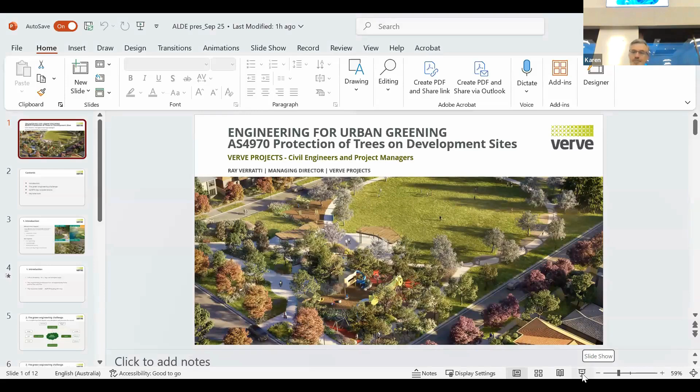That was yours, yeah? Yep. Okay, we're on. Can I move that screen down? Yeah. So I can just see this. Yeah, beautiful. Okay.

Hi everyone, I'm Ray, and I've been asked to do a presentation on the protection of trees on development sites, part of a bigger story of what I call engineering for urban greening. I think as engineers, we've got a really great opportunity to lead the way in improving the amenity of the suburbs that we're all creating. It's a big topic, but it's going to be short and sweet because I've got Mark here with the big long cane, and he's promised to whip me out if I go too long, because I can get a bit excited. So just bear with me.

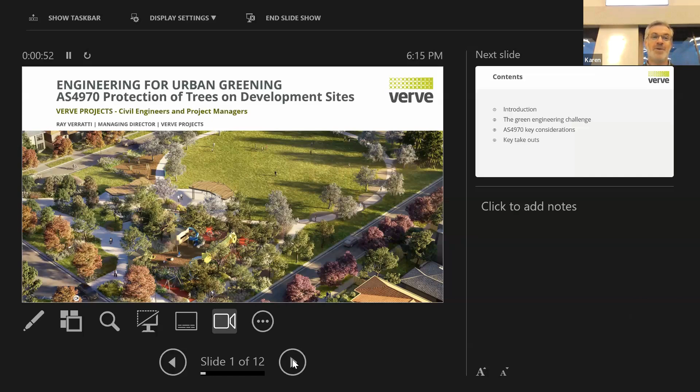So we're going to go through a bit of an introduction of who we are and what we're doing, called the Green Engineering Challenge. I'll talk about the bigger picture, and then we're going to dive into the Australian standard, which is specifically around tree protection, and hopefully I'll leave you with some key takeaways. Hopefully you'll find this informative.

So, just so you know, Verve Projects has been around since 2001. We've been fortunate enough to work on some of Melbourne's really good master planned communities, and we operate in civil engineering, project management, and a bit of development advisory to help our clients acquire projects, plus this concept of urban greening, design and advocacy. It's been a lot about me, but now it's blending through our organisation, and I'm really proud to say that Verve's staff are really connecting with this idea, and we want to integrate it into the way we go about doing things.

So this concept of engineering for urban greening - as I said, it's a big and complex topic. I think as an industry we've sort of disconnected ourselves a little bit from the ultimate outcome. We're about building neighbourhoods and communities, and trees are part of the infrastructure, what I think we should be calling the infrastructure mix. As engineers we coordinate all the elements, but probably don't do this element as good as we can, and that's been my thrust over the last few years. There is some sophistication to this, but I'll leave it at that because it can go on and on. I think the engineering profession has a real big opportunity to be part of the solution.

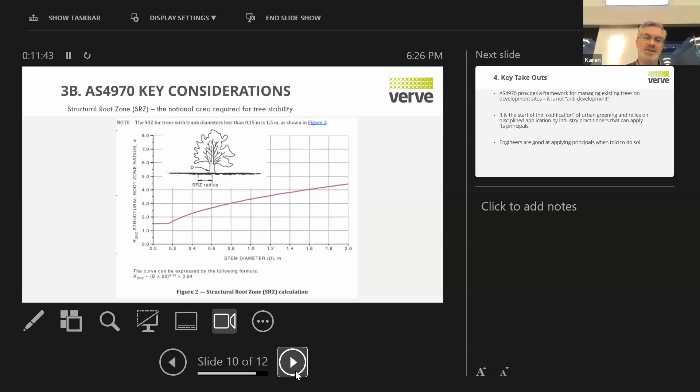So some key takeouts—and this first point is really important—the standard for protection of trees on development sites provides a framework for managing existing trees. It's not anti-development. I think there's a sort of 'oh my God, this is going to cause grief' reaction. Yeah, sometimes it does, right? And there's ways around that. But generally, if you take a non-judgmental approach and just think this standard is here to help you work around a constraint, right? So it's not anti-development, it's actually pro-development. And if you have the right team in place, you can actually deliver and maintain the natural environment.

I also think the standard is the start of what I'll call the codification of urban greening, and relies on disciplined application by industry practitioners that can apply its principles. I think we'll see more of this codification starting to come. A lot of cities around the world, and even some jurisdictions around Australia, are now starting to really force the issue on this. In Melbourne, we're starting to see councils putting the 30% canopy cover requirement into planning permits. I think that'll gather steam over time.

As I said, I think as engineers we've got an opportunity to influence and be part of that codification. And I reckon we're really good at applying principles when we're told to. So when we're told to do something, we're really good at it, but when we're not told to, we don't worry about it. That's fair enough, because we've got pressures from our clients to deliver product quickly, efficiently, and cost effectively. And there's always a perception of 'why should I do it if next door ain't doing it?' Until you standardize that, I think we're always going to be just talking about this stuff and not actually doing it.

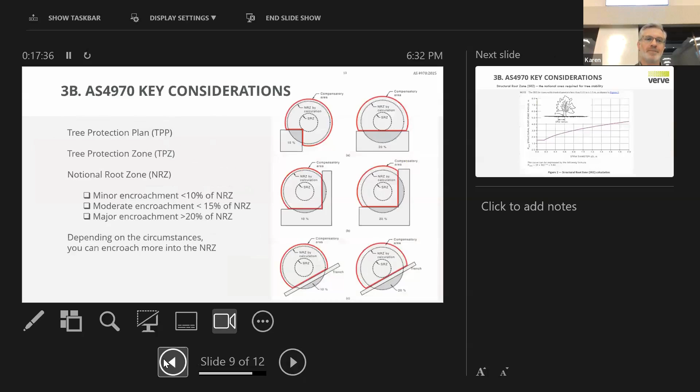I know that's not what your presentation is about, it's about the code, and I have to say I'm quite excited about reading the code, because it's got lots of things that can help us. But how do we get around the bigger picture, tiny lots, tight streetscapes? Because that's where the trees are going to be, but we just can't make it.

Most councils have a 16 metre street. And most councils now in a 16 metre street will only let you grow a medium-sized tree. Yeah, in your slide they're massive trees, and that's what we need in the street.

100%. And I think history shows that it can be done, it's been done, yes, but all these rules and regulations are there. Correct, and that's where I think, personally, there needs to be a big reform on all of that.

But then in this one I think I've got service infrastructure, right? So I think we have - in fact Matt Thompson's here who did it for me. Yeah, big call out for Matt Thompson. When you were, I think, an undergrad when you did this for me, I got Matt to go through all the offsets from all the respective councils, the different offsets to trees.

You've got all the different offsets. In some councils you can't plant a tree 4 meters from a driveway, or 5 meters from a light pole, and they're all different. So for me, that needs to be completely reformed, if genuinely you want to improve the urban greening outcome.

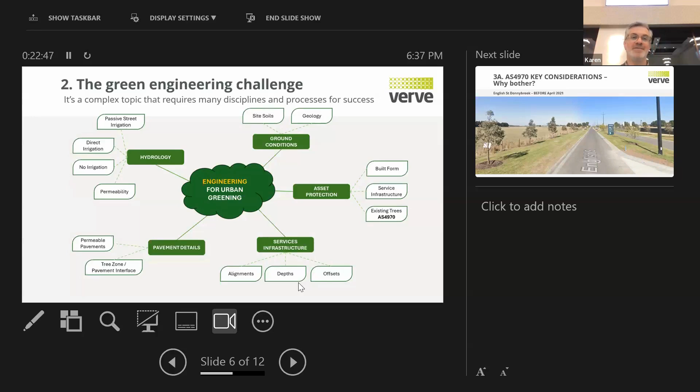It's part of that story here where urban design, I've started to challenge even the idea of the 16 metre road reserve. I think I did this a while ago, but I reckon it's probably 60 to 65% of the roads that we deliver in the growth areas, somewhere around there, that's that cross section, and it's heavily dictated around parking provisions.

Like the PSPs often provide different sections, or outdents and all that stuff to try and do what you're talking about, doing more greening at that lower level, but more smaller and more.

But when you get into the reality of it, when you start doing all your parking provisions, well, that's why we do our 7.3s gun barrel everywhere, right? So there's this balance. Councils have got to look at parking and not just blanketly put one visitor park per lot. There's some areas that you could reduce that. And if you start reducing that, you could start to do indents and put other greening elements into the street.

Again, we just get told what to do, right? So you get a bit hamstrung, and I think it's up to some of the local governments to start to innovate around that stuff. And there's some that are. Where's Tim? Yeah, he's an innovator. We've done some great stuff at Casey.

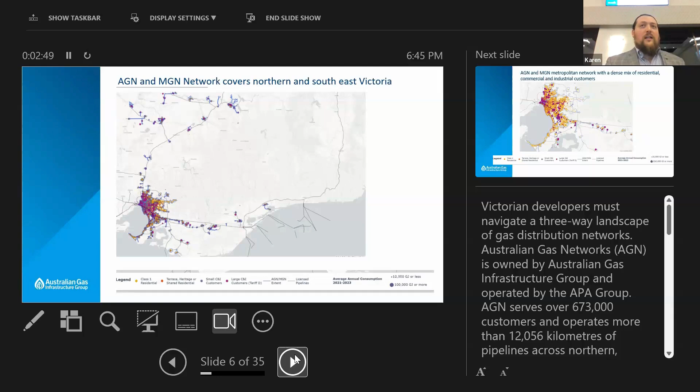Here's a heat map showing some of our residential, industrial and commercial sites throughout Victoria, going all the way up to Wodonga and Albury, and out into Gippsland as well. We have a significant blend of all those customers, and our goal is to serve all of them. So even between the two networks we operate with our partners at APA, there is a significant blend of industrial and residential customers.

Okay, so we've had quite an eventful time over the past few years with natural gas in Victoria. I thought I'd summarize that with a few pieces of legislation. So the Victorian Gas Substitution Roadmap, coming in at the start of 24, has been gazetted. And if you didn't put in your planning permits before then, you weren't able to get gas reticulated. New gas appliance rebates and incentives were also disallowed from the 18th of April.

The Essential Services Commission also updated the gas distribution code and gazetted that on the 1st of Jan 2025, at the start of this year, so that they will apply an upfront cost to all reticulation and services. Previously we wouldn't have charged for installing a service upfront - it would have been distributed across the tariff over 15 or 20 years. Now that's all upfront, as has been legislated.

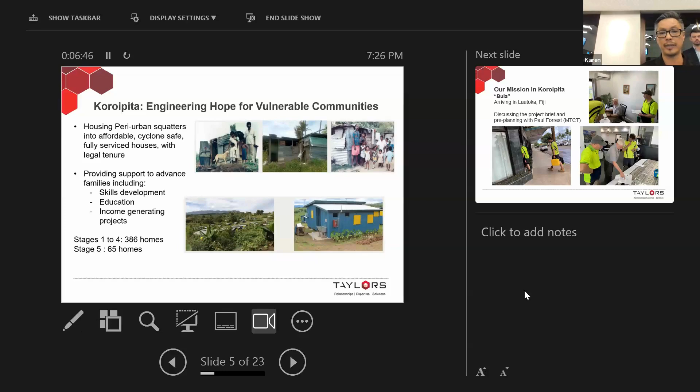So off we go, this is our journey in Fiji. Our mission in Koroipita - Bula, that's welcome, hello in Fijian. So we arrived in Lautoka, Fiji.

We got straight to work. That's Paul Forrest, the general manager who took over from Peter Drysdale. He's the lead. We connected with Paul here in Melbourne online to pre-plan our trip, and that's us walking into his office getting a project brief before we head out to site, talking about what we intend to do for that week.

I should say it was myself, John Yeldon, and Chris Burrows here. And I should have introduced - I've got Raj, our design lead, and Chris, our surveyor, who joined the field party.

So here we are, we went out to sites from Paul's office. Paul was part of an organisation called the Model Town Charitable Trust, overseeing the development of this village, Koroipita.

So we meet here with Ronald. He's the foreman, the lead out on site in terms of the construction work.

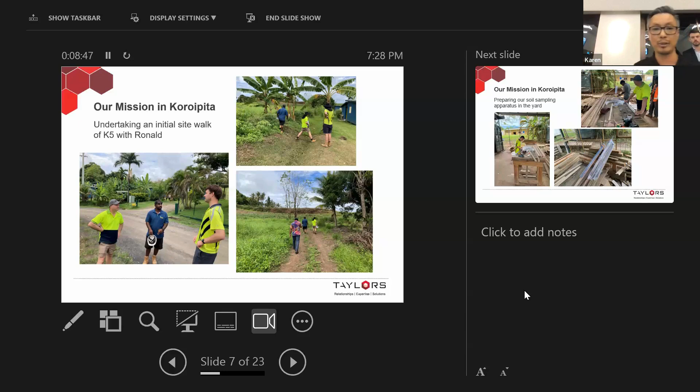Before our last trip, our team actually trained Ronald in surveying, so he's been able to set out all of the infrastructure works. We provided the design, the files, and he's been able to undertake that. We try to keep developing that skill set while we're there, as well as donating further equipment. Like all good consultants, we obviously do a site walk before we get stuck into anything.

This here, we're back at the yard. The story behind this - while heading to the Melbourne airport, we had to drop into Bunnings and bought all that material to put together the permeameter. I'm sure I've got that on.

I know Ernie, I saw Ernie earlier, and I know you're probably going to critique the integrity of our setup there, the apparatus. But you know what, it worked a treat.

It sealed okay, so that's us putting all that together in readiness to check the permeability of the soils. That would obviously feed into our engineering design for effluent fields.

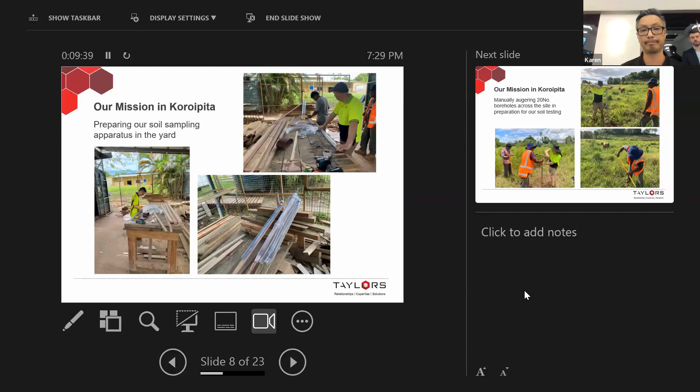We get straight to work. Very hot conditions, mid 30s most days. Like I said, the spirit of just getting the job done. While we were there, we knew we were on a mission. That didn't matter, we had some help from the locals.

That auger, we bought the auger bit at Bunnings, and Ronald and his team put together the rest of it. We took turns augering down to 1.5 metres and did about 20 plus of them through the whole day. So that took a day.

There was never any complaints, and we knew the reason why we were there. I must say, I'm not in any of those photos, but I assure you I did some work for sure.

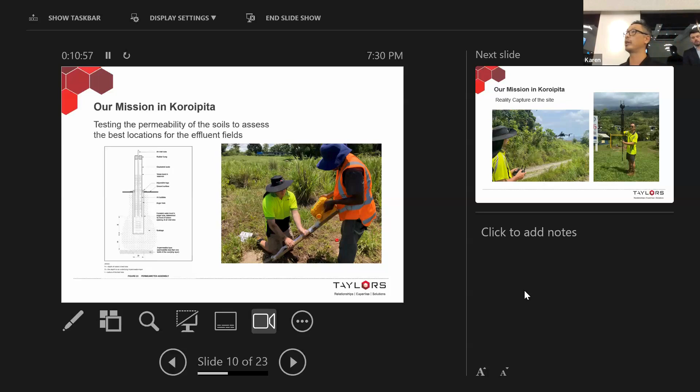Just another photo of us filling in the permeameters and making sure that they're sealing. That's a diagram of what it should do, just to check the permeability of the soils and the best locations of where we would locate the effluent fields in our design.

I'll hand over to Chris here, who will talk about the survey side of things. Thank you. So while we were over there, we captured a few different things and tried to bring a bit of technology over. One piece of equipment we used was a UAV, or drone, which we flew over the site - not just our area of development, but also the previous stages already built - and produced what we call a reality capture model. It's basically a 3D model of the entire site that we can supply as a web viewer, send across to anyone, and they can view the site in 3D and assess the conditions and the developments without necessarily being there in person.

On the right, that's Andrew with a 360 camera. He walked much of the development taking regular photos, equivalent to a Google Street View, so that we can cycle through the images anywhere on the development and get an up-to-date image of the conditions out there. I must say this technology brought a lot of attention from the locals, with kids running over, never having seen anything like this before.

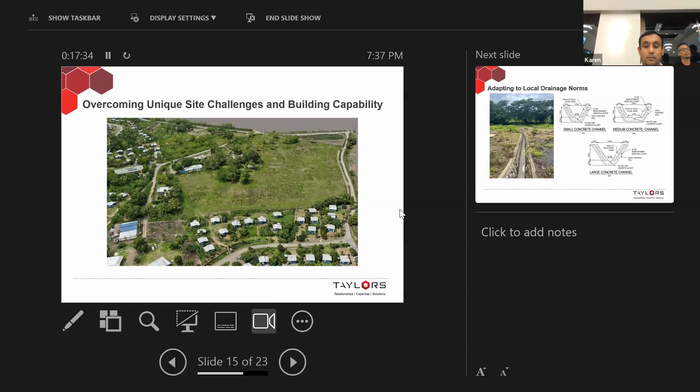Good evening, everyone. I'll get started on the civil infrastructure design. As you're all aware, it's never easy designing civil engineering infrastructure, but in this case, doing it remotely and in an area very different to Victoria presented its own unique number of challenges, which I'll go through.

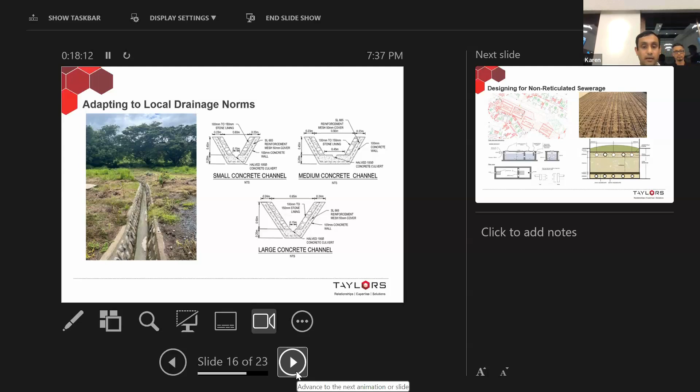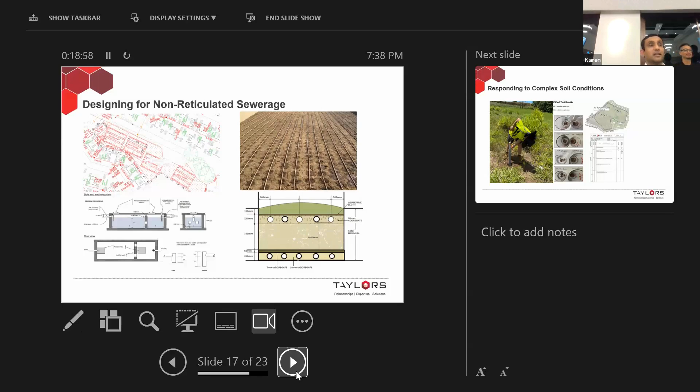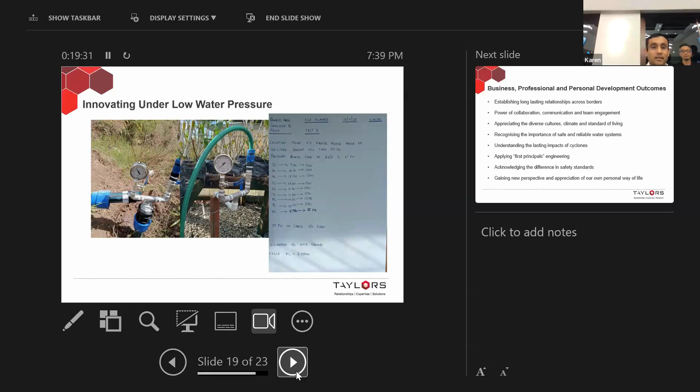That's basically what we just spoke about, the complex soil conditions over there that we had to deal with. The other challenge was they had about 10 meters of head of water pressure, so it didn't really allow for fire services too well. We had to put in a tank and a pump system to try and work around that situation, which is not something you normally find in Victoria. That's probably the main challenges, and the professional development for us in the engineering design area. Thanks.

Alright, thanks Raj. To round it off, with our experiences, the outcomes for the business, both professional and personal across the team - I talked about immersing our team in that experience, and that experience will provide opportunities for others in the future, for the next time there's an opportunity we'll send a different team. I was fortunate enough to join this trip. We've been able to establish long-lasting relationships across borders - the power of collaboration, sharing information, our knowledge in terms of the technical side, their standards over there versus ours. It's something we were able to do quite well.

Part of that experience, we appreciated their culture - the living conditions, how hot it is - and just basically, even while we were there undertaking our work, it really put everything into perspective. Recognising the importance of safe and reliable water systems - we take that for granted here, but they're not in Koroipita. They didn't have that luxury, and part of what we were trying to do was provide that for them.

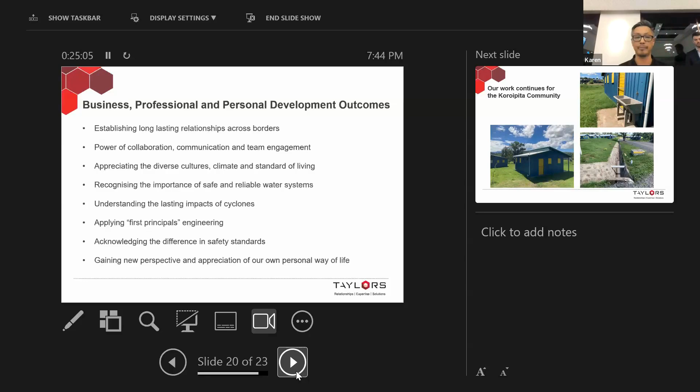What was the authority approval process? Look, I must say probably better than here. To be honest, they are still going through their planning application. So that's our land capability assessment, our engineering design, currently sitting there. We will wait to hear if there's any amendments needed. I'm not sure how many authority hurdles they've got to get through.

I just want to congratulate you on the project. Question around the treatment of wastewater.

Did you put in a secondary treatment plant, or how did you go from the dwelling - where does it go, then get a discharge field? Did you have an old septic type system, or a secondary treatment plant? Yeah, it was basically similar to what you do in a rural setting. We've got the septic tanks, they all got collected up into the septic tanks, and this is just black water, not other wastewater. Other wastewater was just discharged because that's what is permitted there. The black water was treated through a septic tank, then went into sand filters, and then the effluent was dispersed through trenches in the soil. So the trenches had to be quite large, or the area had to be big, because there was low permeability there. We did get results from the university over there, and there's a bit of conflicting information, but luckily we did our own assessments to know it was low permeability. Thanks.